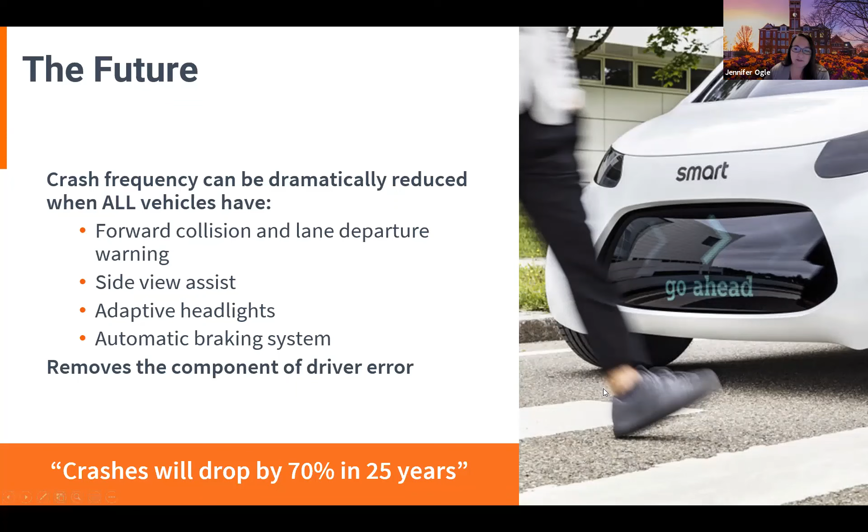But the question still exists: what about pedestrian errors? The vehicles will be driven by computers, but the pedestrians are still going to be driving themselves. Case in point, looking back at an autonomous Uber crash, which most everyone's probably familiar with. The crash happened at night in a mid-block section of roadway on a multi-lane facility. The pedestrian struck was crossing the road from the left, and the self-driving Uber vehicle's perception module got confused in detecting whether it was a pedestrian or a bicycle, because the pedestrian was actually pushing the bicycle across the street.

And so herein lies one of the problems: this is not a normal crossing location for any pedestrian. When we think about decision-making systems and detection, there is some expectation built into decision-making, even self-expectation within us as drivers. We don't expect pedestrians to be coming from the left in the middle of a mid-block section. We might expect to see them on the right-hand side walking on a sidewalk, but definitely not in the middle of the road at this particular location.

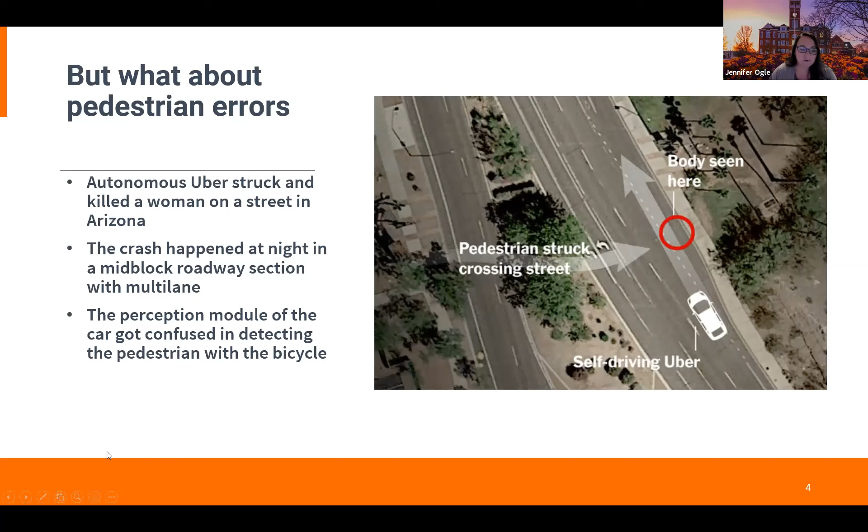So why did the pedestrian cross here? That's a really good question. Looks like it might have been a long distance to the next intersection. Maybe they thought they were going to be able to safely get across. Maybe they thought the driver of the vehicle saw them and would slow down and stop. Those are all questions that we will never know about this particular case.

Also, in thinking about CAV adoption, there's going to be a continuum for a good number of years. It takes a really long time to infiltrate the vehicle fleet with new technology, sometimes upwards of 10 to 15 years, in fact. One, because of the cost of the new technologies in the vehicles, but two, people are holding on to their vehicles longer and longer. Average vehicle life expectancy is over 10 years now. So there's a lot that's going on, and we have to think about that as we are rolling out systems and expecting benefits to occur from those.

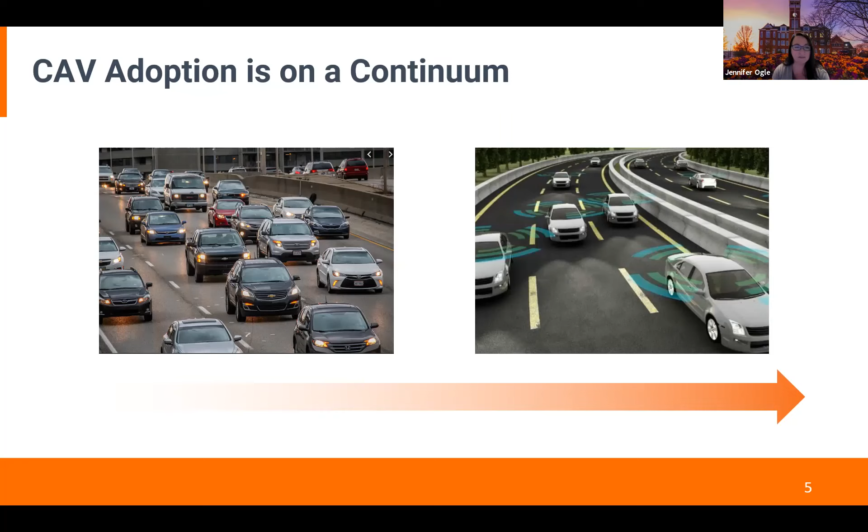Our goal, this was planned as a two-phase project. The goal of the first piece was basically to assemble and analyze data that will help us develop simulation scenarios for CAV detection and response for pedestrians. The second part was to basically do those simulations. So this was kind of like the first piece, to pull a lot of the data and understanding together.

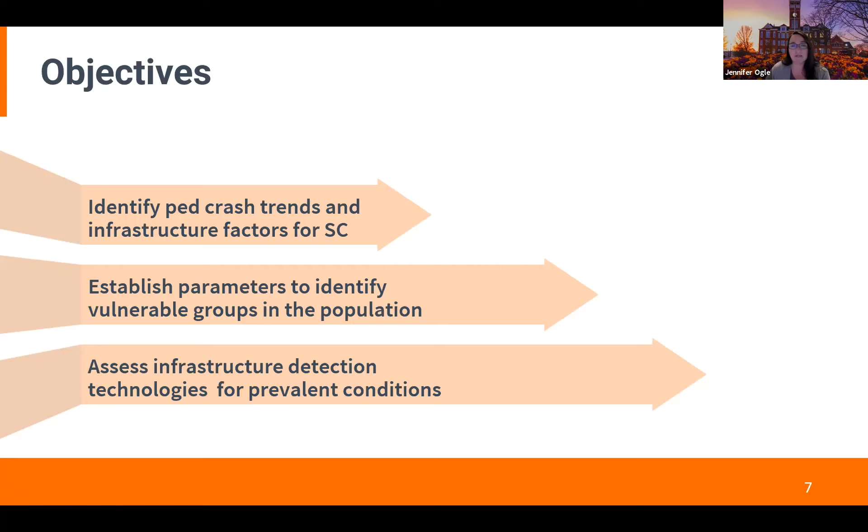Within this, we had three different objectives we were going after. One was identifying the pedestrian crash trends and infrastructure factors for South Carolina. Another was establishing parameters to identify whether there were any specific vulnerable groups within the pedestrian population. And then also to assess infrastructure detection technologies for prevalent conditions: what types of roads, what types of environmental situations were these crashes occurring in.

So we started this and we had multiple different pieces. The first piece we looked at was pedestrian crash analysis, and we used an expert assessment and a manual procedure. I'll tell you why: what we wanted to do was to really kind of understand why crashes occur. So we did a lot of research of prior literature and research done by others.

There were two key papers that set us forward on a path for what we wanted to do with our project. Olson and Sivak, 1996, studied nighttime pedestrian visibility, and found that the driver's ability to visually detect pedestrians depends on lots of factors: the weather, the driver's age, how well they deal with light adaptation going from dark to light and vice versa, their vehicle headlights, and any roadway lighting. Through all of that, basically what they found, the average detection distances for young and older drivers are listed over here. Let me see if I can get the highlighter out.

If you look at an individual dressed in white, a young driver can detect them at about 81 meters. Whereas if you look at an older driver over 65 years old, that drops down to 35 meters. So that's a huge difference. Older drivers have a much shorter detection distance than younger drivers, and herein lies the problems with humans: we have very unreliable systems.

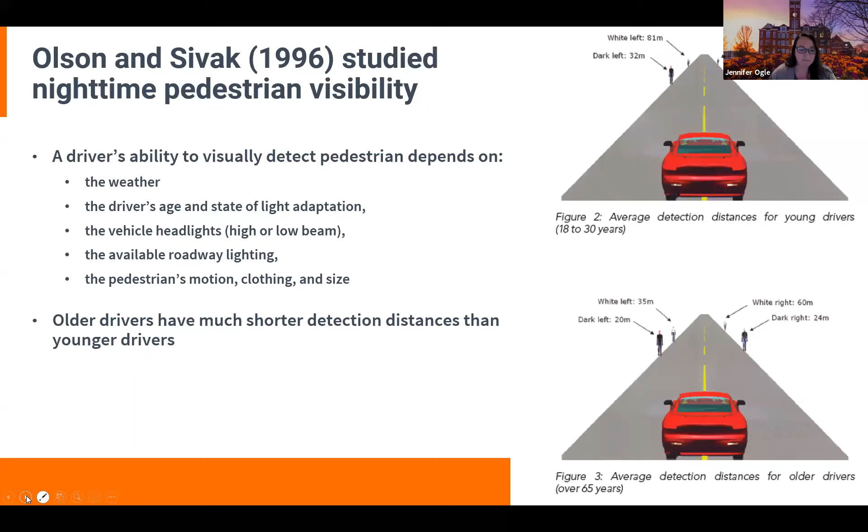The other research project was done by Schneider and Stefanich, 2016, which introduced a method for classifying pedestrian movements. They classified 296 pedestrian crashes and looked at the location relative to an intersection, whether it was at an intersection or on a roadway segment. Then they also looked at the direction of the pedestrian movement relative to the motor vehicle. So if the motor vehicle was going straight down the roadway, was the pedestrian walking along the roadway, crossing it, or doing something else, like working on a vehicle? There were lots of different codings, and they came up with 20 different coding schemes for pedestrian maneuvers.

I would say that we actually developed our crash coding scheme before we identified this paper. This paper helped us think about it and put it into some more precise categories, but it was interesting how closely our research and this research fell together.

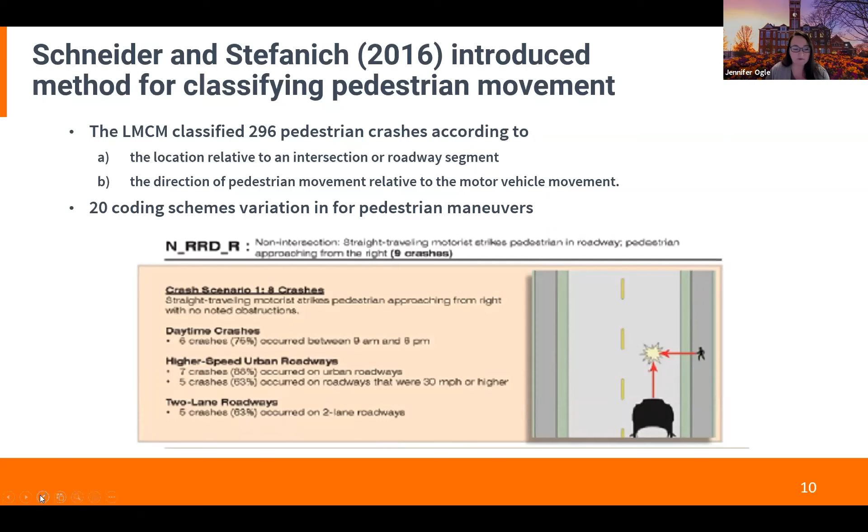So in this process, we basically collected crash reports, crash databases, and all the different roadway inventory files. We set out to manually code crashes and conduct trend analysis to understand the crash patterns. Then we developed automated code for quantitative analysis so we could run that same detailed manual process on large databases, and went through quantitative analysis of the crash data.

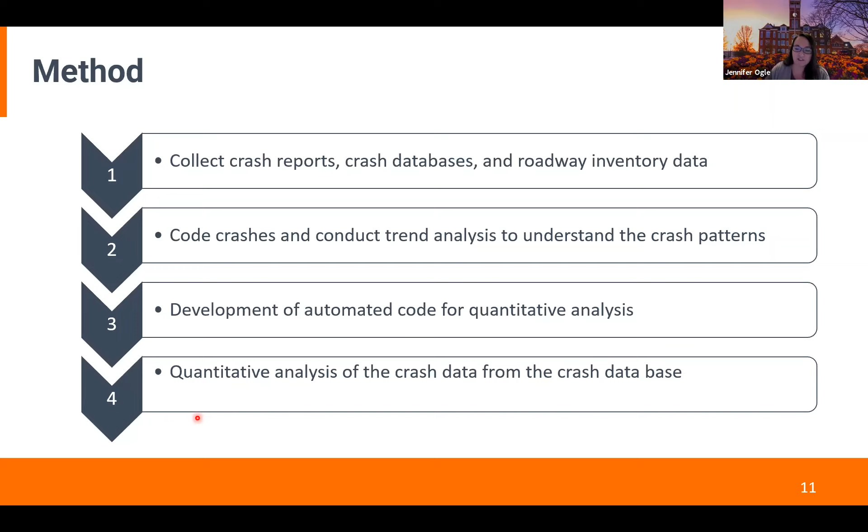Crash data analysis took a two-pronged approach. Our qualitative analysis was done for 2 years, 2014 and 2015, using both the police crash report forms for South Carolina and Google Earth. The second part, where we got into coding and looked at larger databases, used 2007 to 2018, a much longer period. We looked at the crash databases and the roadway inventory database that SCDOT contains.

For this research, we used 4 primary coding categories. The first are pedestrians walking along the road. The second are pedestrians crossing at midblock. In one case, the vehicle and pedestrian are going in the same direction, and in another, they're going in opposite directions—so we had ped along same and ped along opposite. For crossing, we had the pedestrian crossing from the right of the approaching vehicle and from the left. You'll see these categories again and again through this research.

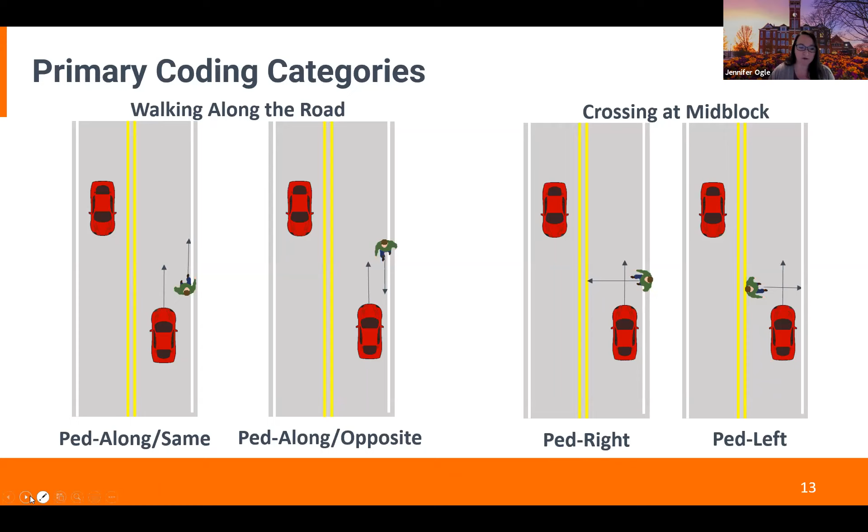We received from the DOT a large number, actually all, of the fatal pedestrian crash reports. Those tend to have the most data, the most complete of all the crash reports. We looked at all those fatal crashes for a period of about 2 years—roughly 90 in each year, so about 200 fatal crashes total.

The reason for doing this was to identify the factors we thought were important, but also to make sure we had good coding and could check what we were automating within the coding for the databases against our manual work.

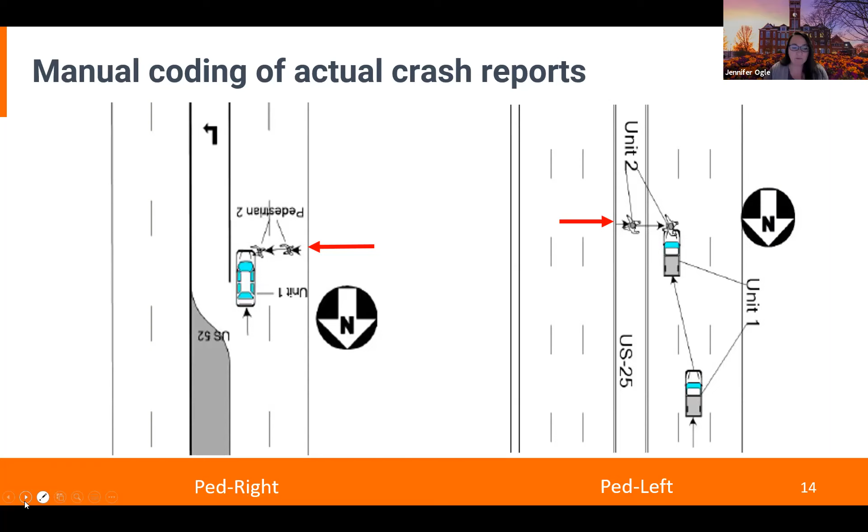We did this in 2 batches. We did 1 year, and Sabab and I coded these individually. We compared all of our codes, talked through and walked through why we did or didn't match, clarified and tweaked our coding, and then moved on to the next set.

After that, we put together a bunch of infrastructure elements and did a manual qualitative analysis of a good number of pieces of infrastructure at each of the crash sites. We looked at the presence of light poles, the presence of sidewalks, the number of lanes, median type, and median width, examining those sites specifically in Google Earth Pro.

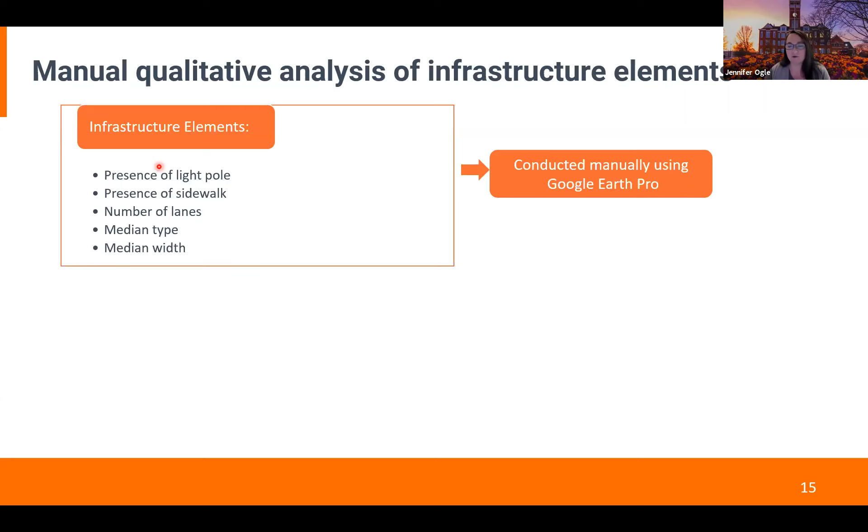These are all of the sites that we looked at. For each site, we pulled it up on Google Earth and coded things like number of lanes, the width of the lanes, and whether or not they had light posts in the area. Lots of data was collected through that process—a bit time consuming, as Sabab can tell you.

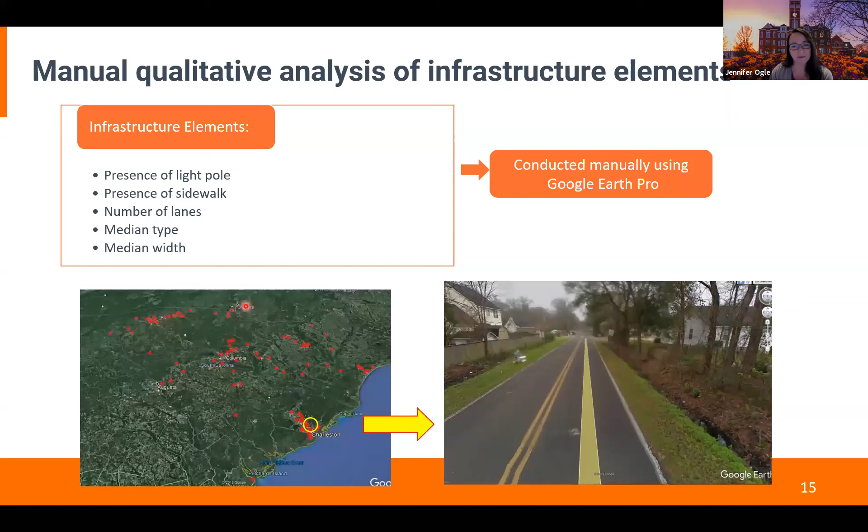We have results for things other than our 4 scenarios, but I want to focus on those 4 for the results. We looked at the percent distribution of crashes by direction of travel for 2 years, 2014 and 2015. In 2014, 30% were ped along same, 5% were ped along opposite, and 7% and 16% were basically crossing-type crashes from the right and from the left.

You notice this varies from year to year quite a bit. We had a lot more percentage of those crossing crashes from the left in 2015, and a lot less of the ped along same direction in 2015.

But when we started to look at some of the characteristics, those really started to hone in and look very similar. So we saw some really good trends.

When you are looking at walking along the roadway, there are a number of light poles, or a number of sites that don't have light poles present—very few that do. When you're looking at the crossing, again, light poles not present is the predominant situation, but there are a number of situations where we do have light poles, more so than for crashes walking along.

Presence of sidewalk was also a factor. What you see here is that walking along crashes tended to not have sidewalks present. That makes sense—if someone's going to get hit by a vehicle walking along the road, chances are they're walking in the road and not on the sidewalk. And it makes sense that if a sidewalk is not present, more people will be walking in the road.

Whereas when you're looking at crossing type crashes, there did tend to be more sidewalks present than sidewalks not present. So that trend, or at least roughly equal numbers of sidewalks present and not present, stayed the same.

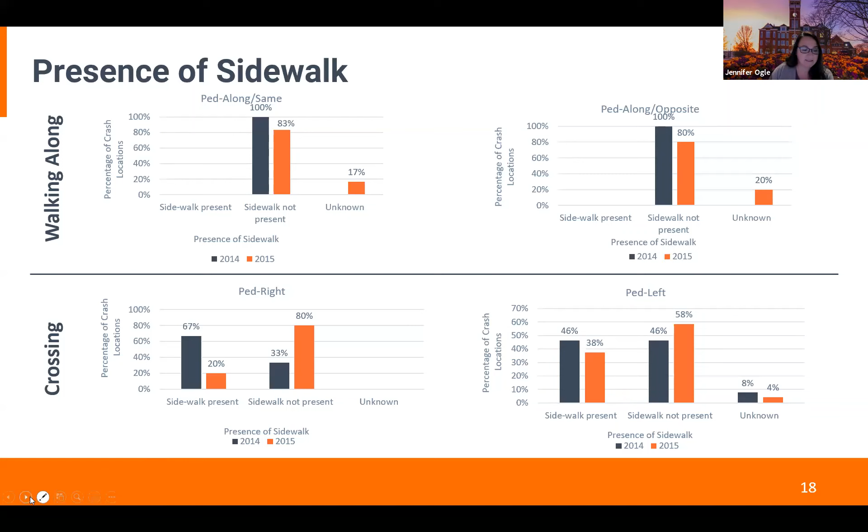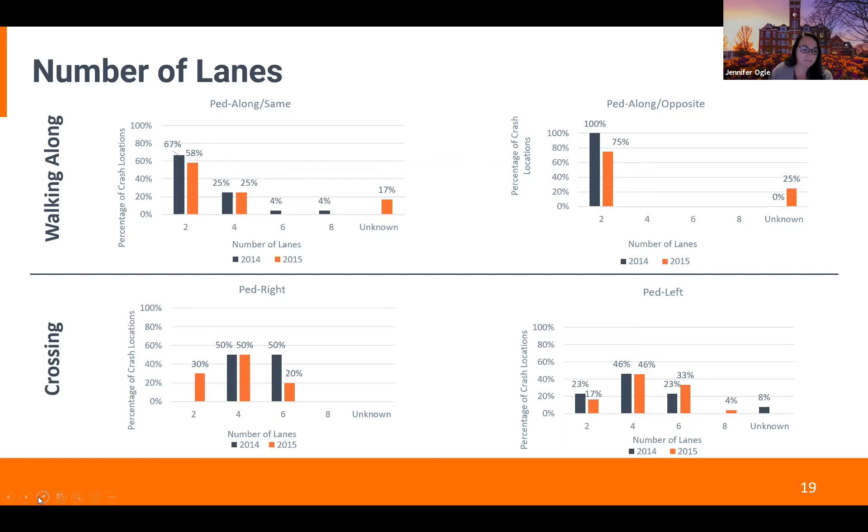So that was kind of all the stuff that we learned from that manual process. But we used that manual process to carry over to a quantitative process—moving from looking at things from a qualitative standpoint, we still did quantitative in the other, but really more from trying to figure out what we wanted to do, to looking at large databases in a more automated way.

So moving to that quantitative analysis, we took the results from the manual analysis, looked through what information we had in the crash databases and roadway inventory, and started to develop automation code so that we could go through and code all of the crashes in the database the same way we had done with the crash reports.

And then we ran the automation code to get the direction of travel of the pedestrian with respect to the vehicle. Then we separated out nighttime fatal crashes and also assigned direction for walking and crossing crashes. The last piece was basically pulling out all of those mid-block crashes, and we did a spatial join for that.

These are kind of steps that we learned along the way. One of the things I'll point out is we spent a lot of time looking at dark conditions. The first time we ran this, we used whether or not the police report said dark or light conditions. Later on, we actually went in and did a more thorough review, using sunrise, sunset, and even looked at the twilight periods to see if there were any differences.

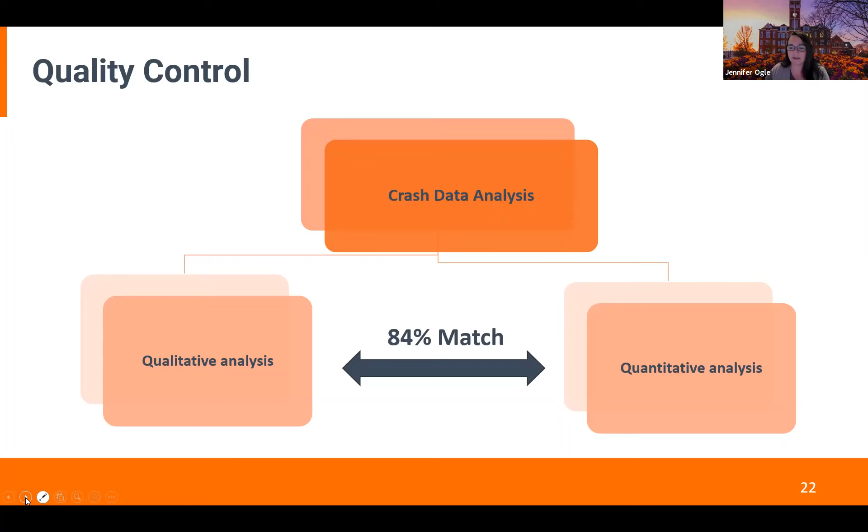We actually ended up processing a lot more data in the quantitative analysis than we even did in our qualitative analysis. So this allowed us to really look at a huge number of crashes. Overall, we had a little over 1 million crashes in the database that we looked at, over about a 10-year period. There were roughly 0.7% pedestrian crashes—7,656 of them—of which about 13% were fatal.

And so we have kind of focused on the fatal crashes, but we've gone back and done some work on the injury and still see a lot of the same types of patterns with severe injuries as well as fatalities. So with the fatalities, we looked at and separated out the daytime crashes, which were just under 20%, and really focused on the nighttime crashes because those were the bulk of the fatal pedestrian crashes, at 80%.

Then we separated those again further between nighttime intersection and nighttime mid-block crashes. Again, you see those mid-block crashes for the fatalities being the predominant 85%. From there, we took those crashes and looked at walking versus crossing, other and unknown. And we really focused on the walking and crossing because those were occurring in the walkway.

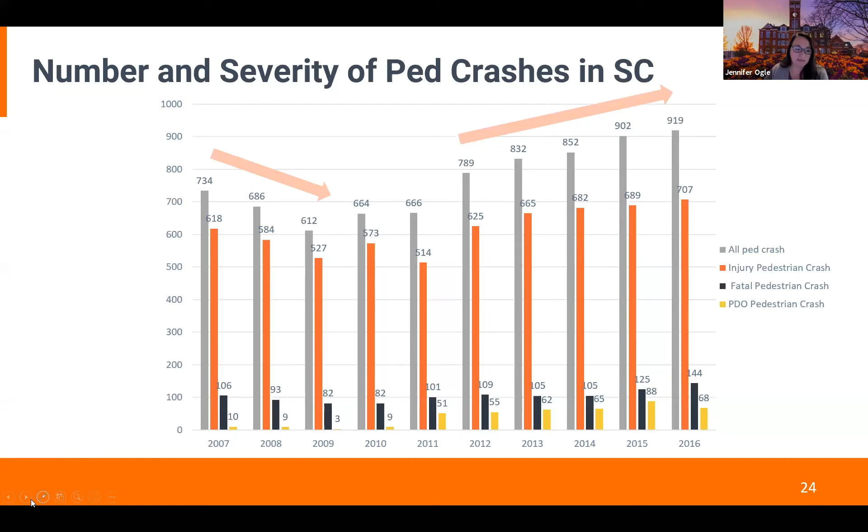So number and severity of crashes in South Carolina, we basically saw kind of a starting and ending trend. We were declining in total numbers of pedestrian crashes for a few years at the beginning of this period, and obviously a very clear trend of increasing crashes as we are coming out of this period. And we're still seeing that trend of increasing continue.

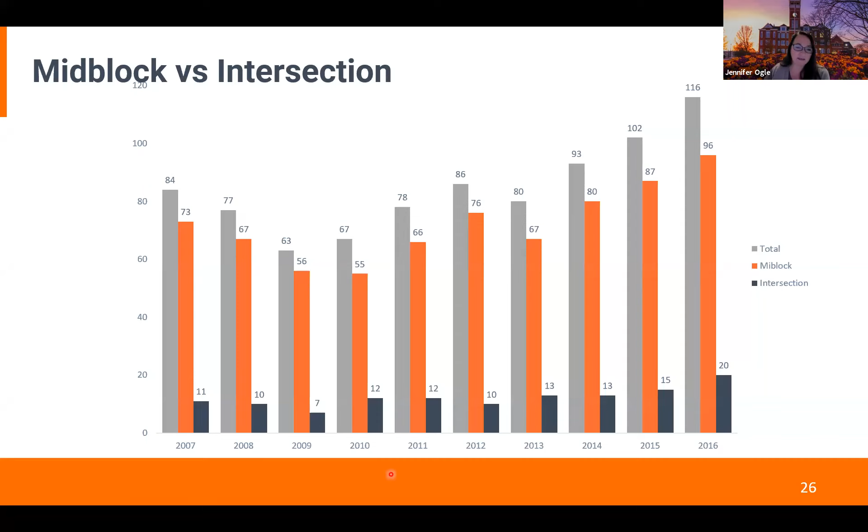So then we looked at day versus nighttime conditions. And again, we already saw that 80% of the crashes were nighttime and 20% day. And that was pretty consistent throughout the time period. Midblock versus intersection. Again, midblock, we saw overall about 85%. And again, that was consistent throughout the time period.

And then for our quantitative analysis, we also looked at infrastructure information, but this time we were limited to what was in the South Carolina Department of Transportation Roadway Inventory Management System. And there we had things like route type, which is whether or not it's an interstate or a local road, route division, whether or not it had a median divide, median type, median width, land use, total number of lanes.

We also pulled from the crash data and kind of looked at the clothing of the pedestrian. And no surprise, clothing of the pedestrian was typically dark, no reflective properties. And again, all of that was automatically pulled and meshed with the crash data.

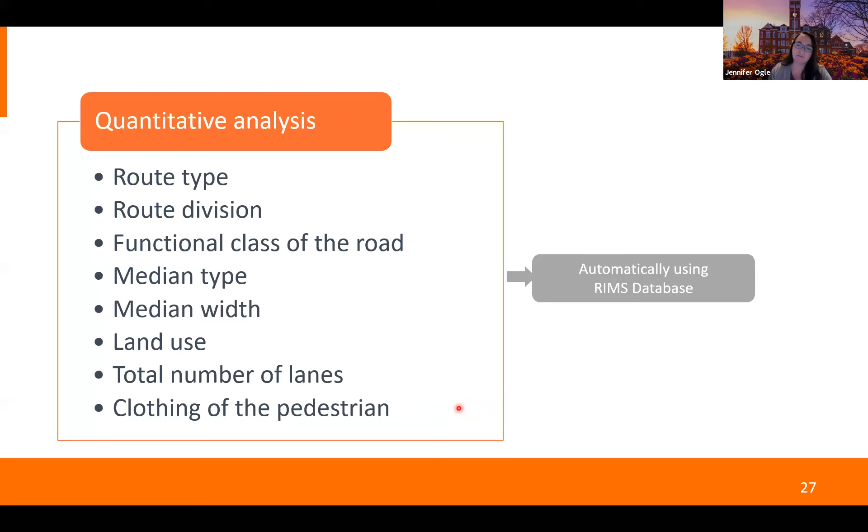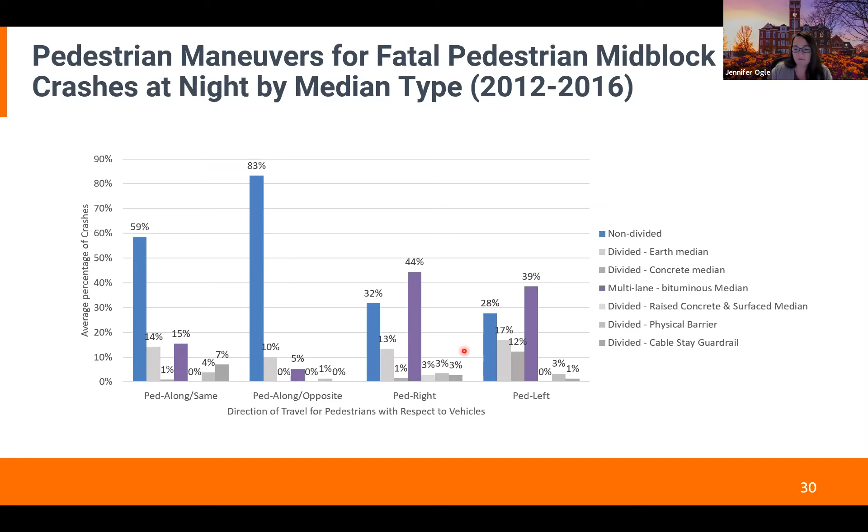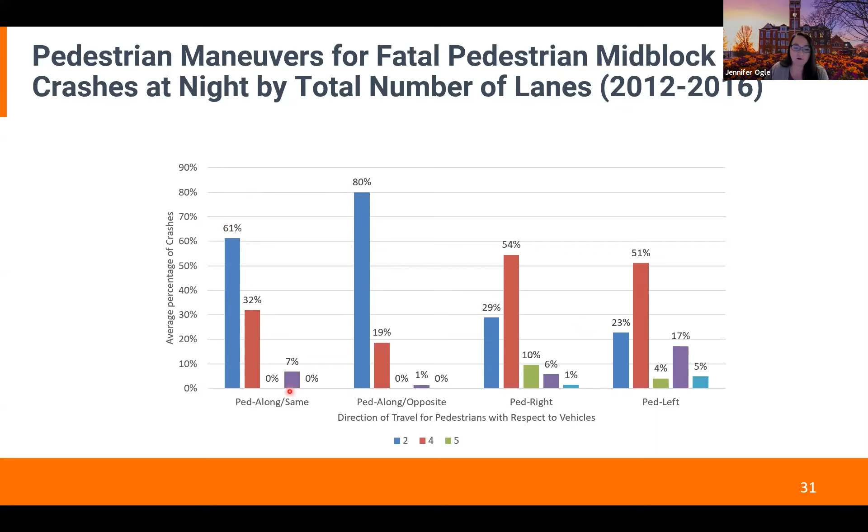Here we'll look at it by the total number of lanes. Again, this is looking at percentage of crashes in our 4 different categories. And we see that our ped right and ped left, so our crossing type crashes, again, are going to be more on the 4, 5 and more lanes, and more of the walking along are on the 2-lane facilities.

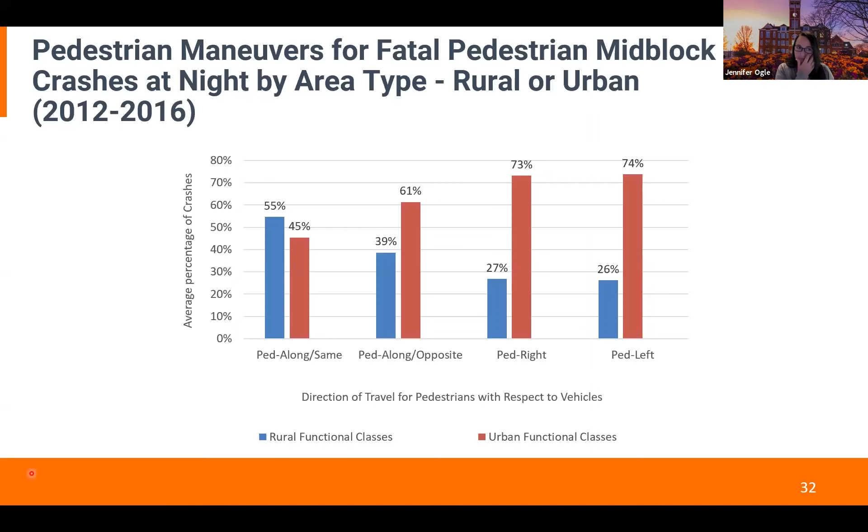Now, so that was all the crash data analysis. The second thing that we wanted to do was look at the socio-demographics of our pedestrians who were involved in the crashes. So we weren't really concerned about the drivers that hit them. We were concerned about who are these individuals and do they have any characteristics that are common amongst individuals who are more likely to be hit than others. So we pulled together a GIS-based census data analysis of crash-involved pedestrians, and that's what I'll walk you through next.

So for this, we collected data. We pulled all of our fatal and injury nighttime pedestrian crash records, and we pulled the pedestrian home location for all of those. About 7% were missing home location, but we got a good number of those crashes. Then we went about geocoding their home location. So we had to clean and prepare the home location information, and then we figured out basically where those pedestrians lived.

From there, we were able to take the census block group data from prior census and mesh that with that home location. And so now we know where the pedestrian crash occurred, we know where the pedestrian's home location was, and we know the predominant socio-demographic characteristics of that home location from the census data. Things like median income and education level of the individuals that live in that particular block group. From there, we summarized all the socio-demographics for all the pedestrians who were involved in crashes at night. And then one last step: you've always heard that people are involved in crashes closer to their home. And so we did a proximity analysis between the pedestrian home location and the crash location.

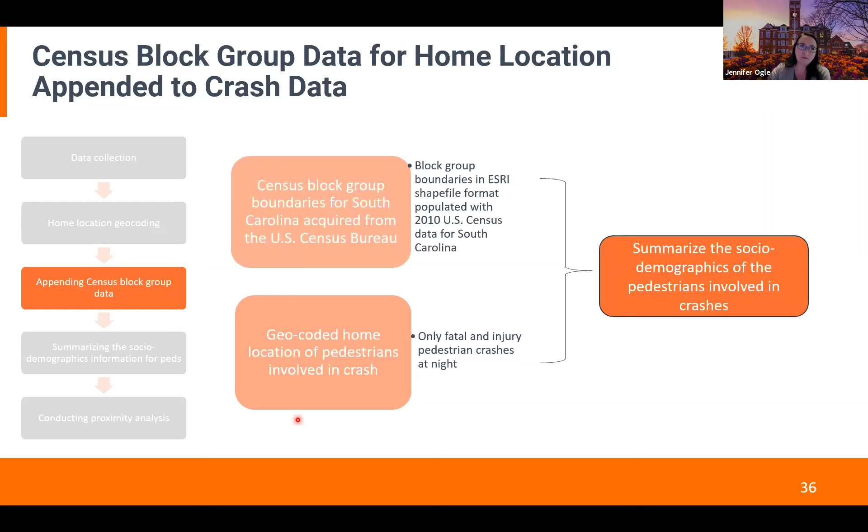That allowed us to summarize everything. So we summarized a lot of different socio-demographic characteristics and categories, population, gender, race, ethnicity, age, and we included several variables, including median household educational attainment, percent in poverty, number of vehicles that they have available in their household, and vehicle age. And then we did 2 different types of analysis. We looked at whether or not there was any significant trend in socio-demographic characteristics based on the distance between the home and crash location. And then we looked at that home and crash location to tie things together.

So here's a summary of the socio-demographic analysis. I'll try to point out a few things. We compared the pedestrians who were involved in crashes to the state average, and if you see a star beside this, it means that there's a significant difference at the 95% confidence interval level. And so pedestrians involved in crashes tend to live in more dense areas versus the population density average at the state level.

And then we also looked at the fatal and injury pedestrian socio-demographics by home to crash distance. Here, where we look at these distances between the pedestrian's home and the crash location, hone in on this. Remember, the majority of the crashes are going to occur in that half-mile range. And if you look at the average median household income, that is the lowest of all of the different range distances. So to me, what that says is we do have an issue with lower socioeconomic status individuals. And so looking at where we have lower socioeconomic status neighborhoods and groupings, we should be taking a look at what is going on with the roadway and the pedestrian facilities in those areas.

Again, you also see some slight differences in Caucasian, African American, and Hispanic percents. Hispanic is higher than most others, African American is higher than most others, and Caucasian is lower. And so again, there are some issues there as well. And the vehicle age and vehicles available per household really do not differ very much by these groups.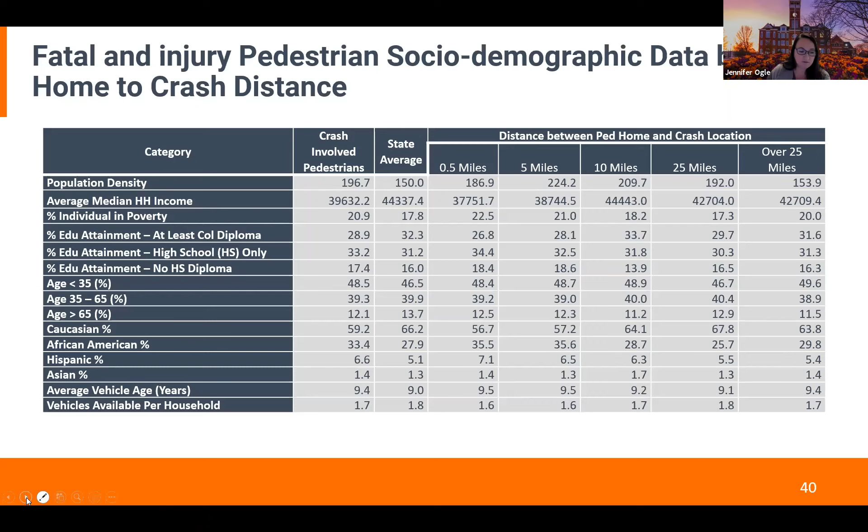So the last thing that we wanted to do is understand how easy would it be to go out in the field and collect data on corridors to detect pedestrians crossing during nighttime at these mid-block locations, because right now there's not a good source of data for that. And so if we're going to move into another level of data analysis, understanding how often that occurs is really important. And so we did a field test and looked at some night vision Autoscope cameras versus some infrared cameras.

And what we found is that any sort of test to look for pedestrian activity at night is going to need a little bit more robust infrared camera to do anything worth doing. And so we set up a site here on campus, looked at pedestrian detection with a night vision camera in a dark, not lit section. We also looked at using an infrared camera in a dark, not lit section. And then we had vehicles there, and we turned the lights on one of the vehicles and used the vehicle light to light up that section of road.

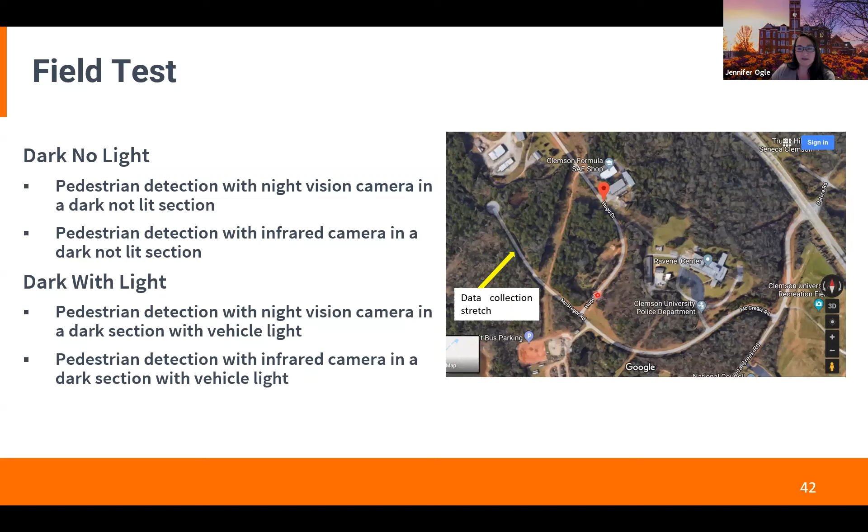It was a really dark night. I think we had about a quarter moon available. So not a lot of extra light, and none of these facilities out here really have big parking lights or anything that would have caused light pollution. We set up the test with our cameras mounted at about 15 feet on our transportation van. And we had, again, the infrared camera and an Autoscope type camera. Then we looked at 8 different crossing locations. The first couple were at 25-foot increments, and then we go from 50 to 100 to 150, all the way out to 300. And there are the vendors for the cameras, power consumption, and the mounting heights were both the same.

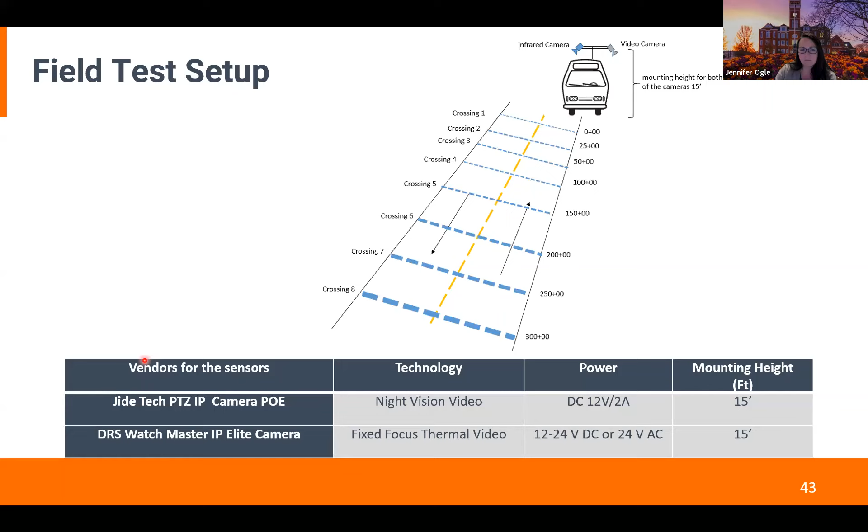We had a number of our graduate students. So a shout out to Dr. Sarah Sua, Feng Shao, Nassim, Jared, and I think that's Leo in the biomotion suit. All of them came out and took a bunch of nice long walks with us for the evening. We had an orange reflective vest, a yellow reflective vest, a white sweatshirt with dark pants, and all black clothing. And we improvised a biomotion suit using reflective tape, and we wrapped it around the wrists, elbows, shoulders, and knees of Leo.

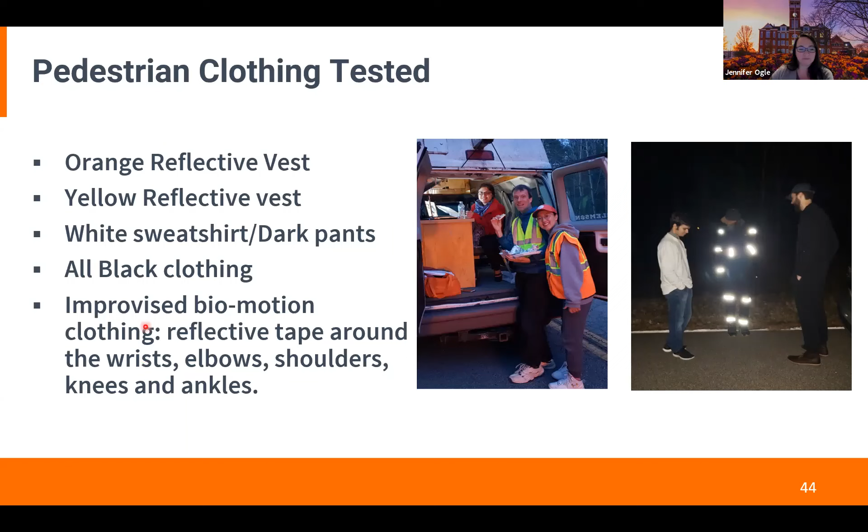And then we had them walk back and forth across the road at all those intervals. We set out cones all the way down so that they would know where to cross. So I wanted to show you a few pictures that indicate what we saw, and sorry, these aren't huge pictures, but you can get the idea.

At 200 feet, the top one is the orange vest. When you're looking at this on a computer, you can see something out here that's a blip in the middle of the road, but is not really discernible as a pedestrian shape. However, when you look at the infrared image, you can see fairly clearly some white pedestrians sitting out here on the edge of the road.

For black clothing, there was absolutely nothing visible in dark, not lit conditions. But again, you could still see with the infrared image that person walking across the road pretty clearly.

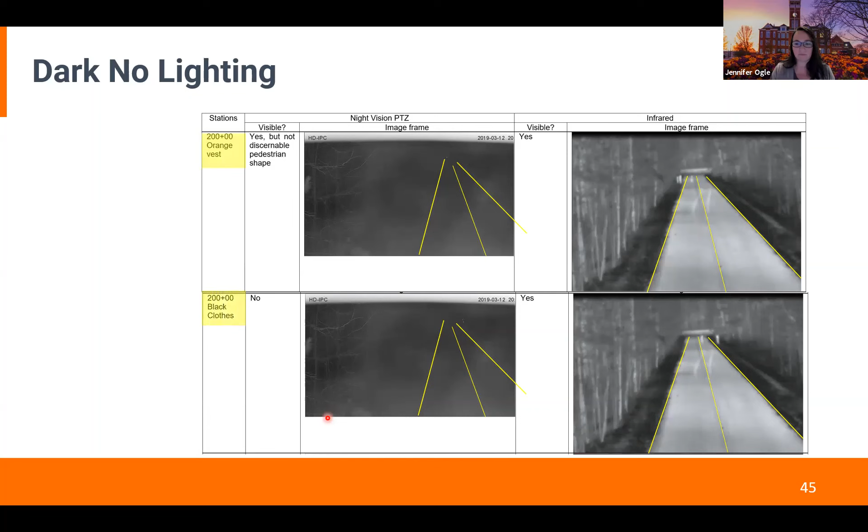Then we had our situation where we turned on the vehicle headlights of one of the vehicles on the site. And again, we did the same type of test where the students and Sarah Sewell walked back and forth across the road in a big serpentine pattern. This is the same station, 2+00. Again, the orange vest is crossing, and you can see that person crossing. Actually, you can see more of their legs than the vest, but nonetheless.

And then with the infrared camera, again, you can see it almost the same as you would in the no-lighting condition. In fact, I think you might be able to see it better because of the contrast without the lighting.

And then again, with the orange vest, you've got that out there, and you can see it pretty clear. I don't know why I have two orange vests -- there was supposed to be a black situation. But you could see it with the headlights at 200 feet.

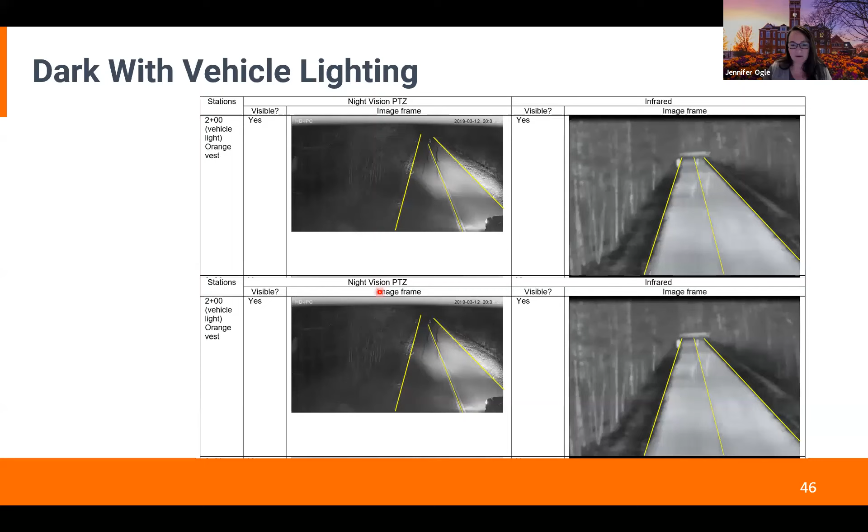Ultimately, the summary of our field test showed that in the dark, not lit condition, with our infrared camera you could see pretty much everything. With the night vision camera, sometimes you could see a little bit of something, but it was not really discernible. So biomotion by far did the best in the night vision camera, and infrared was again always pretty good.

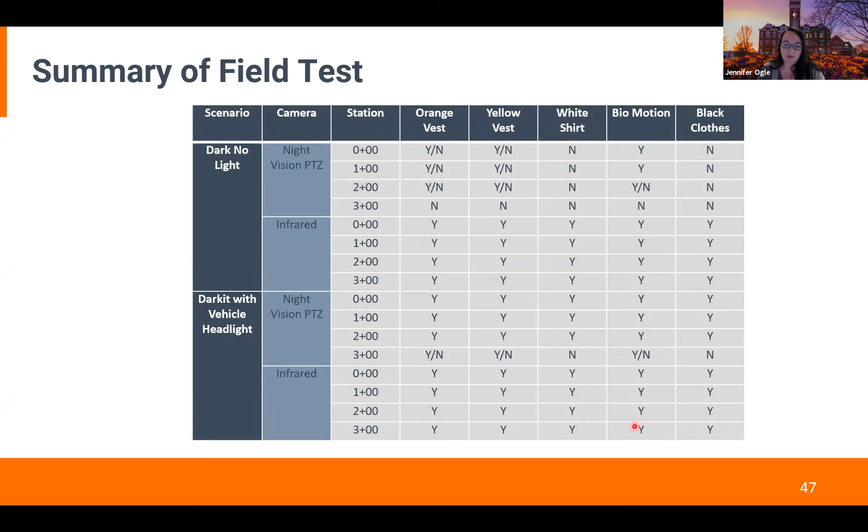One of the other things we captured pretty clearly in this test was a headlight illumination pattern that not a lot of people really know exists. When you look at the headlights from a vehicle, the right light is positioned so it extends out and over to the right-hand side, illuminating the side of the road well for pedestrians along a sidewalk.

However, on the left-hand side, it angles out and down toward the left, because the key there is trying to reduce glare for oncoming vehicles. This is just a really good way to show that illumination pattern. So we have this theory that pedestrians approaching from the left are basically not seen as well because of this headlight illumination pattern, and that has actually been tested in prior research and confirmed.

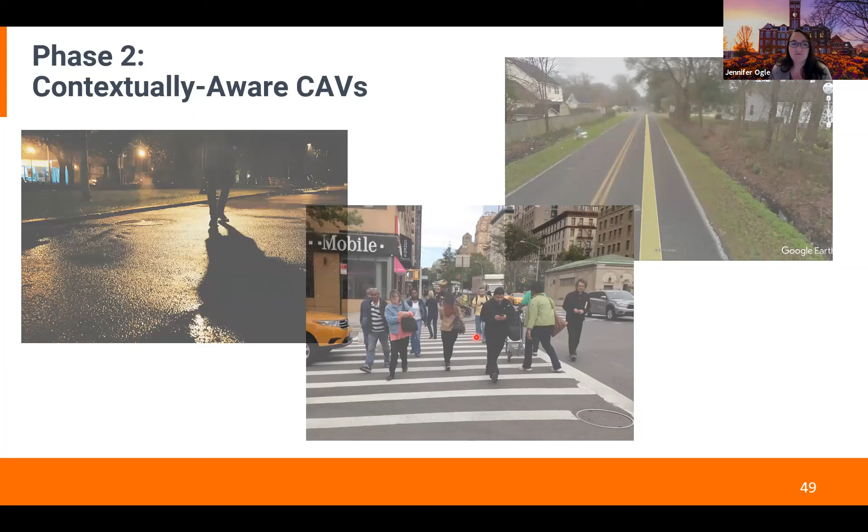So I'll leave you with this, thinking about what do we do with all this information. We're trying to take those environmental conditions, the socio-demographics, and the infrastructure type, and define a contextually aware metric or index for use with CAVs. If we can identify sections of road where we see the potential importance of the combination of these factors, it could be really helpful in identifying locations along the roadway where CAVs should be more aware of potential pedestrian movements and involvement. So that's where we are now, and at this time I'll be happy to take any questions.

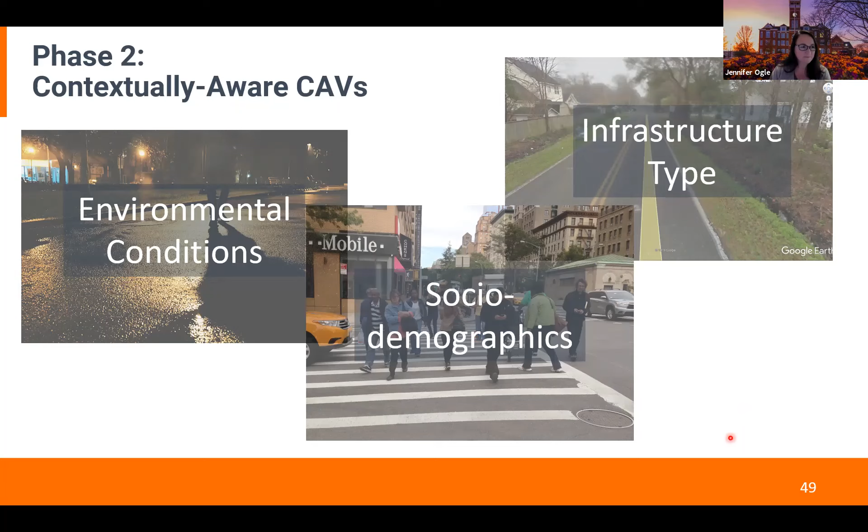All right, no questions -- everybody's speechless. That was just so good, wasn't it?